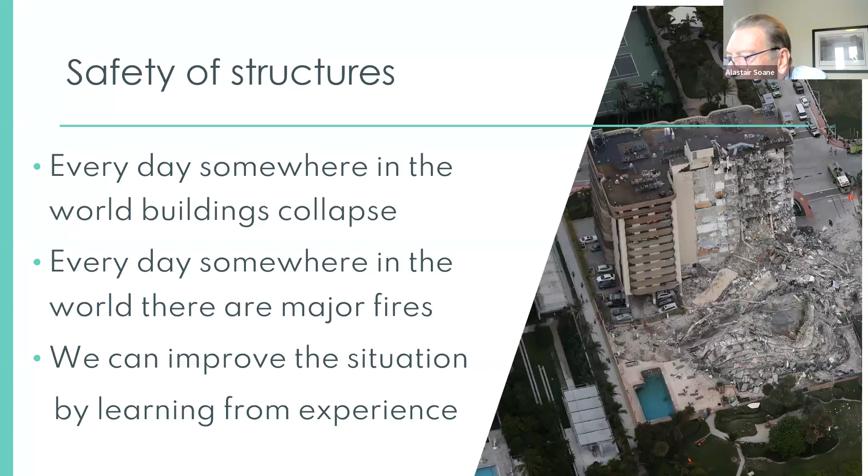Now, it's a sobering thought, but every day somewhere in the world buildings collapse, and somewhere in the world there are major fires. But we can improve the situation by learning from experience, and we'll talk a bit about how we can do that. So the benefits are clearly set out, what we can do with the system we have.

We make structures safer and ultimately save lives. But in the background to that, we can promote cultural change, we can identify shortfalls, we can improve competence, which is very important because we often find that competence is lacking.

And we can assist with horizon scanning, which is looking beyond what is happening normally and seeing what might be the next big problem, might be the next big fire, might be a big structural collapse. But very importantly, being a part of the CROSS community protects your well-being, because anybody who's been associated with a major failure or disaster knows how terribly debilitating it can be. It can ruin lives, ruin careers, ruin firms. Very important to not be involved in a major collapse or catastrophe, and by being a member of the CROSS team, as I say, it will help you do that.

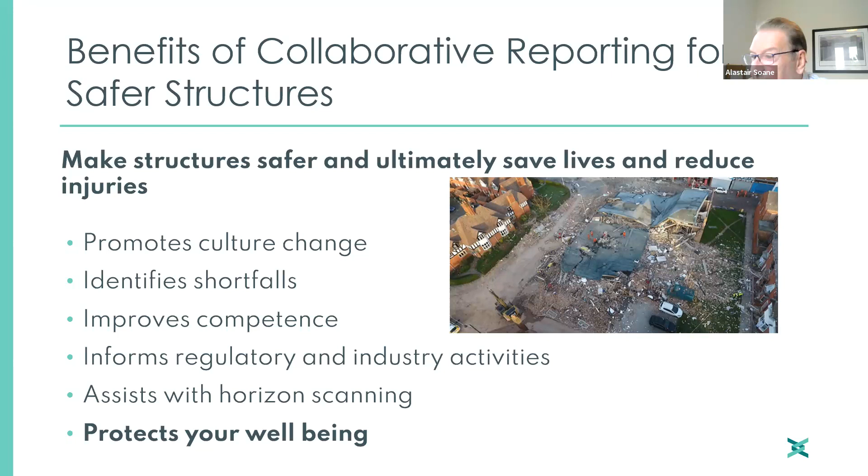So the input to our system is that we get confidential reports to our website. We look at significant events in the public domain, and we get comments from our expert panel, and more on all of those in a few minutes.

So we have a website. Anybody can link up to that. I hope all of you have, but if you haven't, do so afterwards. And everything on the website is free to use.

We promote stuff through social media. We publish reports with expert commentary, and that commentary is designed so that the people reading the report and the commentary can avoid that sort of event in the future. We publish periodic newsletters, we publish occasional alerts, and we make presentations such as this. So there's quite a lot of output. It's all on the website.

So here's some background, and these are just a few slides of major collapses in different parts of the world. This in Bangladesh was the worst man-made, man-induced building failure that we know of, which wasn't associated with some kind of terrorist or military activity. 1,200 people were killed when the garment factory came down.

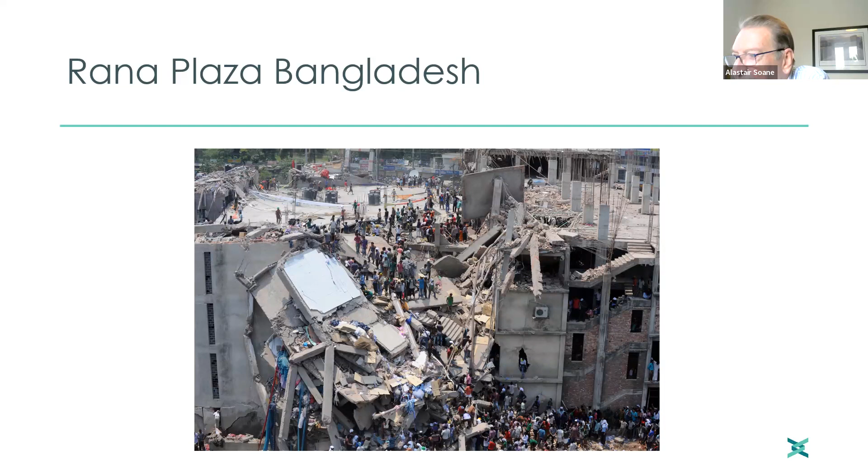In Nigeria, a lot of collapses. Fortunately this one didn't injure many people, but we hear very little about them. This is a classic pancake collapse of a nearly completed building, all folding down on itself.

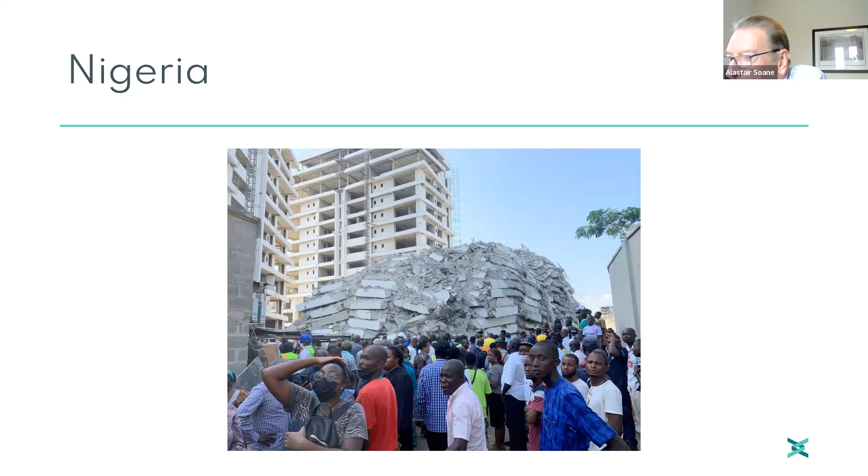India is a place where there are many collapses, and again, not terribly much comes out about the reasons for that. And in the UK, we've had two major events. One was back in the 1960s, Ronan Point, the building on the left here. We'll talk a little bit about that later. And then on the right, the Grenfell Tower, the tragic fire a few years ago, which killed 72 people in the UK. So we have had our share here of catastrophic building failures.

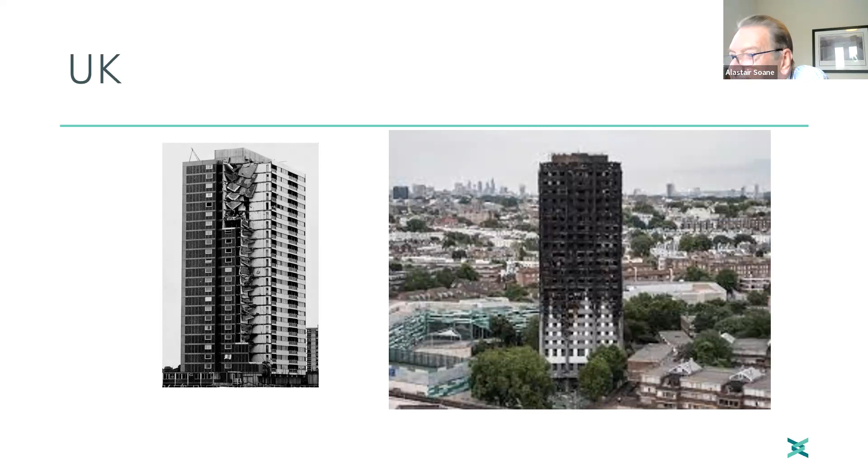And in the US, there has been the catastrophic failure of the Champlain Towers South building. Again, a bit more about that later.

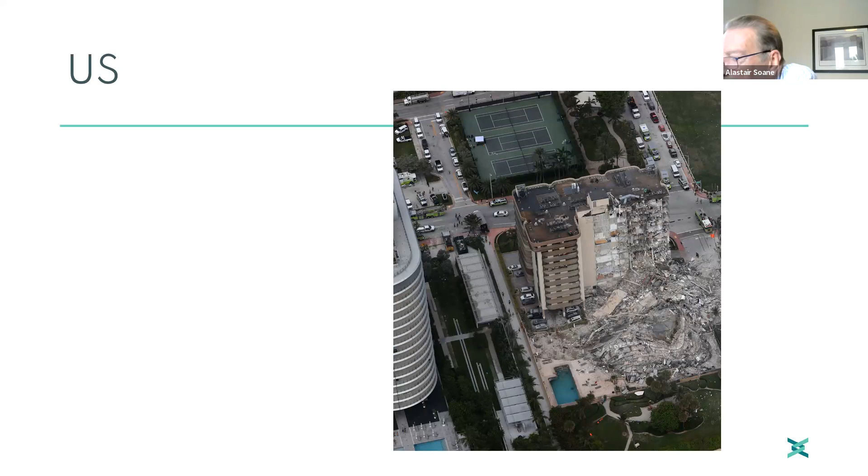And we do have an international network of CROSS. The first group who joined were Australia, and then they were joined by New Zealand, so we've got CROSS-AUS, which is Australasia. We have got CROSS in the United States, which is very active. We hope the next organization to join CROSS will be the Proof Engineers Society from Germany. And there was a time, led by Tony Smith, one of your stalwart members, when we looked at it for Southern Africa, but still some work to be done before that could be made to function fully. But there is an ambition, if the ambition exists on your side, to bring Southern Africa into the CROSS family.

So here is the reporting process that we go through, and we'll start off with a timeline. Back in 1976, there had been a couple of failures. There had been some bridges, box girder bridges, which failed, and that was due to engineers not appreciating the fact that they were scaling up the construction of small bridges to much bigger ones. Owners wanted bigger spans, wanted cheaper bridges, and the flatness of the plates making up the webs of some bridges were not as flat as it was expected.

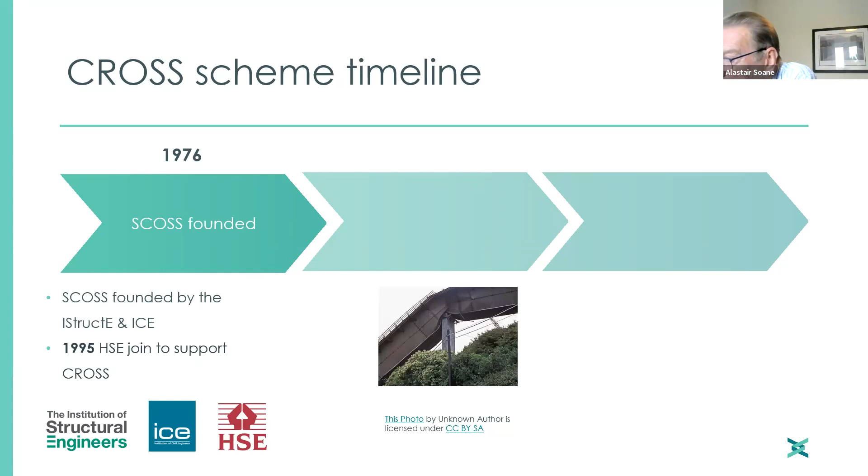So there was buckling. There were 2 or 3 major collapses. Then there was also Ronan Point, as mentioned. At Ronan Point, this was a building constructed of precast floor and wall panels, not very well connected together at all. They were kind of piled up, a bit like a house of cards.

Up near the top, a lady one day decided she wanted a cup of tea. So she filled a kettle, and the buildings had gas in those days. She lit the gas, but something went wrong. There was an explosion, a relatively minor explosion, but the whole side of the building collapsed, causing a number of fatalities. That was the first time the phrase disproportionate progressive collapse was used.

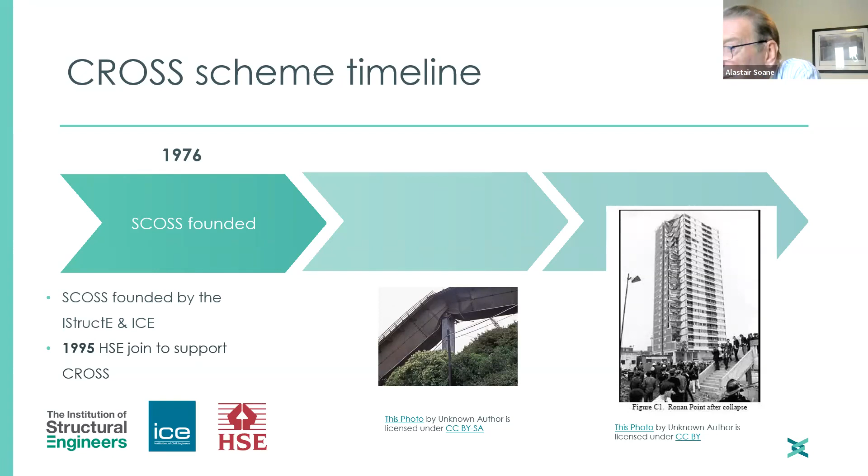So the Institution of Structural Engineers and the Institution of Civil Engineers formed SCOSS, the Standing Committee on Structural Safety. In 1995, HSE, the UK government's Health and Safety Executive, joined in to support the work. In 2005, they decided that a lot of stuff was happening which wasn't necessarily reaching the press or the headlines, so a voluntary confidential reporting scheme should be launched. That was when I came in. I joined to start a trial process, and I'm still here.

We used as a model a system called the Aviation Safety Reporting System, designed by NASA. That's been very successful in the aviation world, and pilots, ground crew, staff, anybody associated with the aircraft industry can report stuff. That's helped improve aircraft safety, which has aided any of us who have flown any time over the last 40 years.

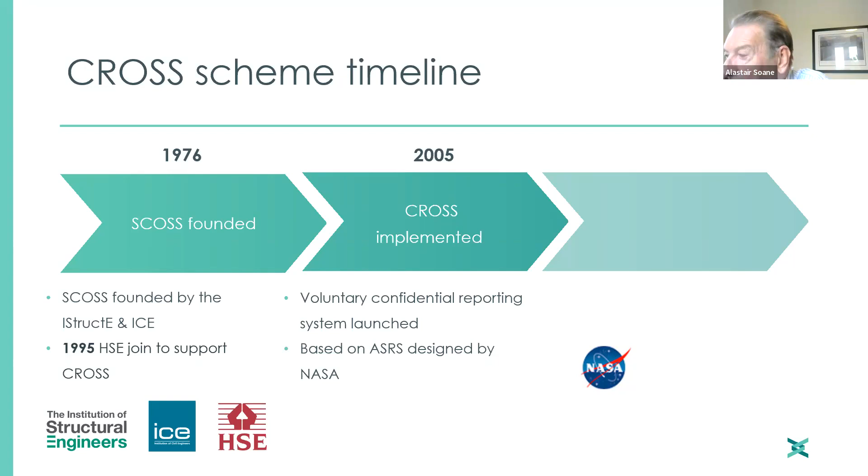In 2021, we expanded into fire safety following the Grenfell Tower fire. There have been 2 major investigations into that. One was by Dame Judith Hackitt, and she produced an interim report into what might be done to prevent similar things happening in the future. The other is an official government inquiry, still going on, which will publish its results sometime next year, covering what happened and why it happened.

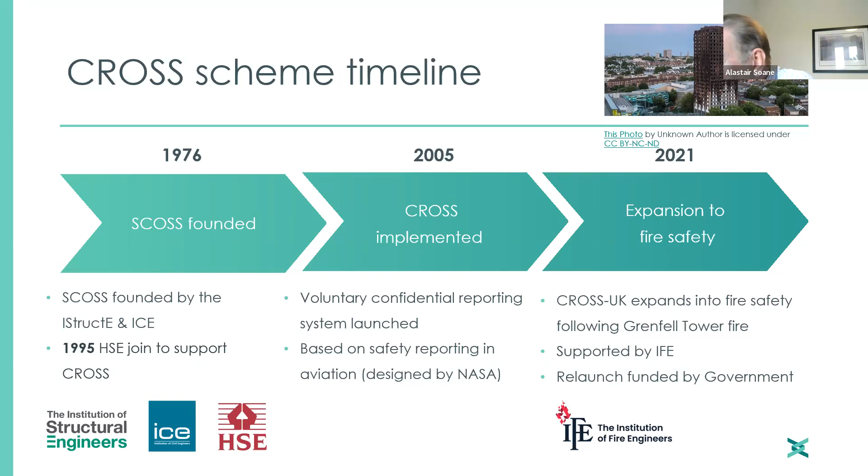But Judith Hackitt's report contained a recommendation that CROSS should be expanded into fire safety as well as structural safety. So we have support from the Institution of Fire Engineers, and we got some money from the government, and launched in 2021 with fire safety in addition to structural safety.

So what can be reported? We're a kind of cradle to grave organization. We will take stuff at the design stage, the construction stage, the operation stage, and at end of life. Most of the structural reports we get come in at design or construction, in fact nearly 50% at construction. We don't get that many during the occupation phase, because not many structural engineers are involved at that time. And we do get some about demolition going wrong.

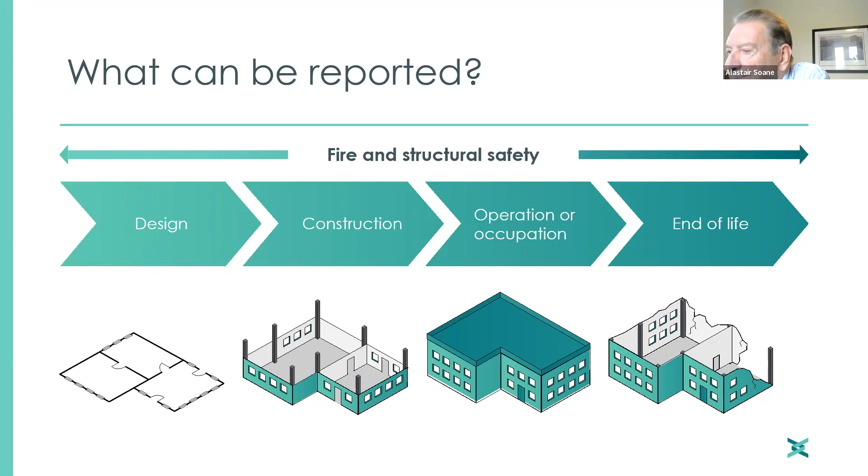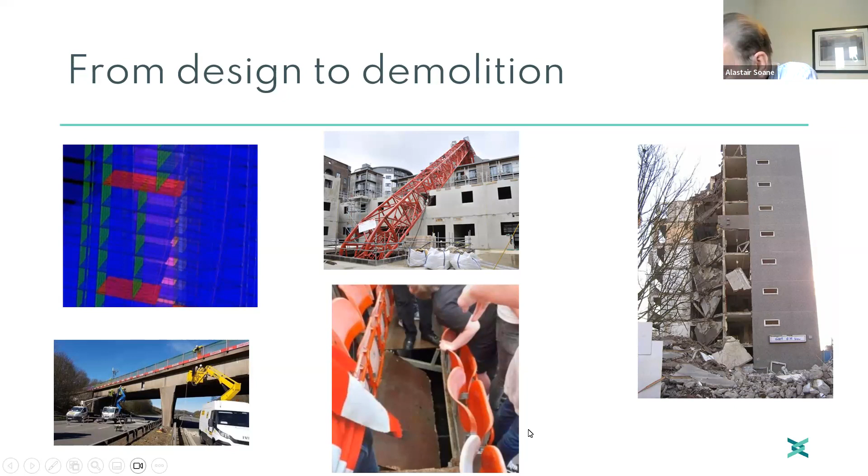And then on the right is a collapse during a demolition. This was a large panel structure similar to Ronan Point. The demolition contractor was going to very, very gently knock it corner down, and then they touched the corner with a machine, and the whole lot came down in another progressive collapse. So we do get examples from start to the finish of the process.

So we have got an SRMS system, which is a complicated set of rules which abides behind the public face of our website. And here's how it works.

Somebody will submit a report. And the process for doing that is very easy, and I want to encourage all of you to submit reports. That report goes to one of a very few number of people who are designated people, and they are authorized to see the reporter's name, but they then anonymize the report.

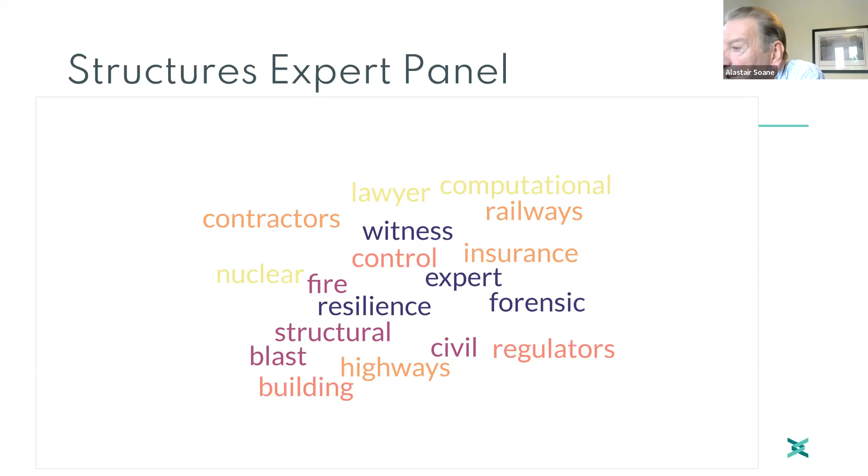So here are some examples, and one of these is in the public domain. There was a bridge that collapsed in Florida in 2018.

It was a precast two-deck assembly, which was going to be put onto supports at either end. During the course of 3 weeks, after it had been put in support, large cracks developed in it. So we published an alert in association with CROSS-US.

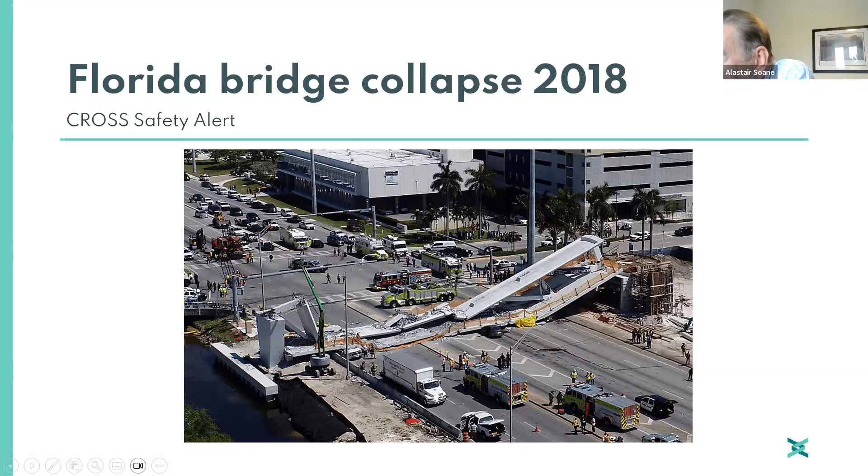Nobody had the ability, the desire, whatever, to say we must stop what we're doing here, prop this thing and find out what's happening. So they said, right, well, we'll apply a bit more force and see what happens. And down it came.

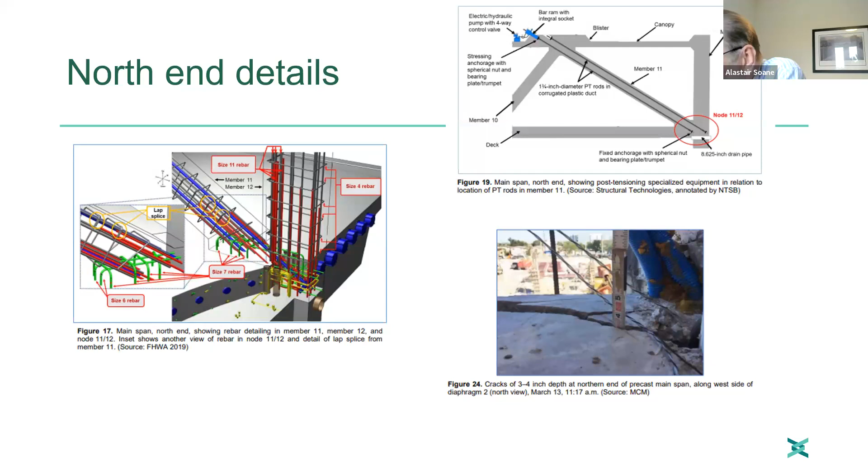The lesson learned there is if you see something which is defective, let people know. If somebody had said we'll look at those cracks, that might have been a precursor—an event—but as it turned out, it was a catastrophic collapse with fatalities.

The gable end of this school building was sucked out, and 9 tons of masonry landed on a footpath. That is another question of luck and timing, because a few hours later there would have been young children and parents walking along there on their way into school. That turned out to be a generic fault, found in quite a number of other school buildings.

It's surprising because there weren't the same designers for all these buildings, there weren't the same contractors, but they had not installed wall ties properly, they had not installed wind posts properly. So the result was there was nothing to stop these gable walls blowing out. Although only one blew out, 17 others were found to be defective and in need of repair.

So the precursor was a safety one. Nobody was killed, but nevertheless they could have been.

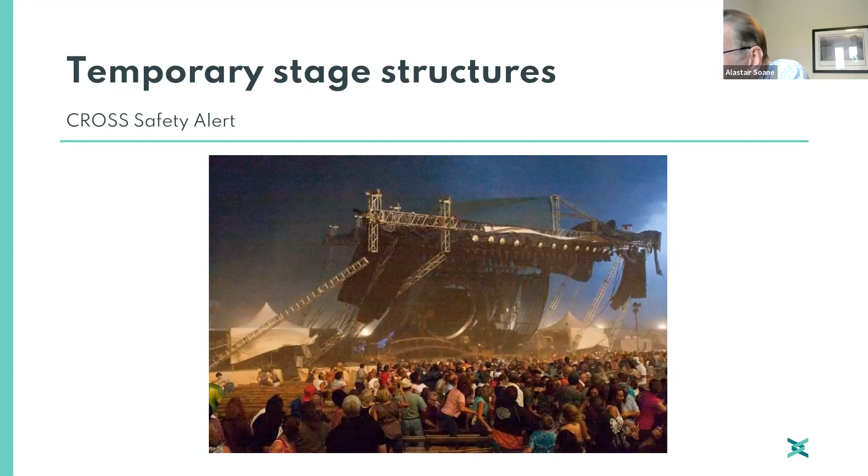Up at the top there was a very big downstand truss, and the intermediate floors were suspended from that by suspension hangers. Then one day, just after 40 people had left the site—another near miss, a matter of luck and timing—the whole structure collapsed.

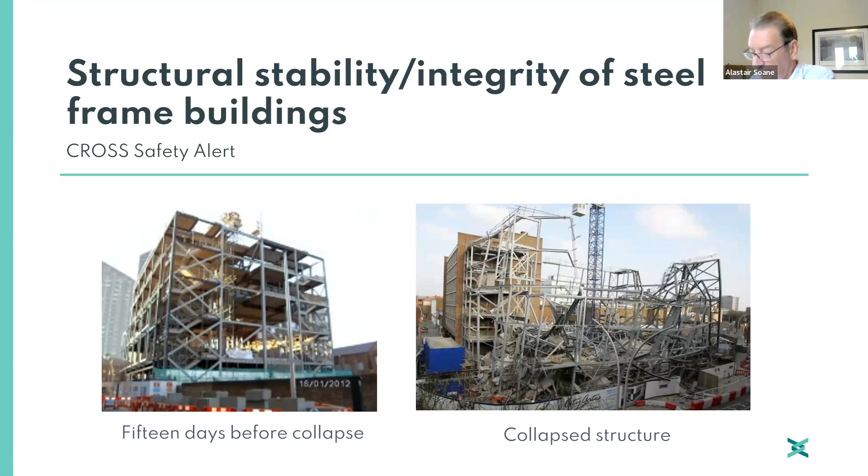The reasoning was never fully fathomed out, but it was to do with tension members failing, and there were inadequacies in terms of design and construction. So the lessons learned from that are about paying attention to the way structures, particularly those without robustness, can fail—and if you've got tension structures, you tend not to have too much robustness.

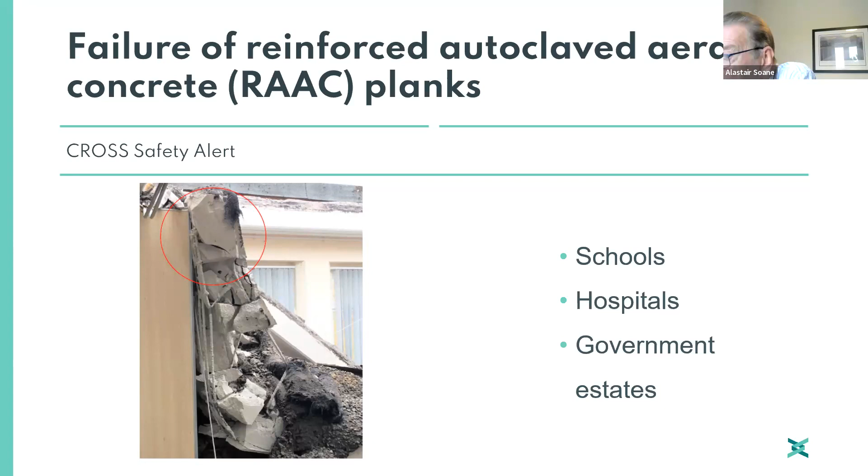So we produced a safety alert in 2019. Here's another one, a plank which had collapsed without warning, and here's the consequence. But this is a hospital which is propped. So quite often you go to a UK hospital now and you'll find some beams and some props holding up the area in which you are being looked after for whatever complaint you've got.

This is a quotation from the London Times in August, where a government minister said 34 buildings have concrete roofs in such a poor state they could collapse any minute. The point is, there have been 150 schools identified now in the UK, partly closed because of the problem. It's probably the best example we've had for the use of CROSS. We get a report in, we process it, we publicize it, we get a few more reports in, we publish an alert. The alert is taken into account by government departments, but not quickly enough. So what we forecast in 2019 has come to pass big time in 2023.

So I'm going to give you a couple of very simple examples to show you that not all CROSS stuff is at the high end and involves fatalities.

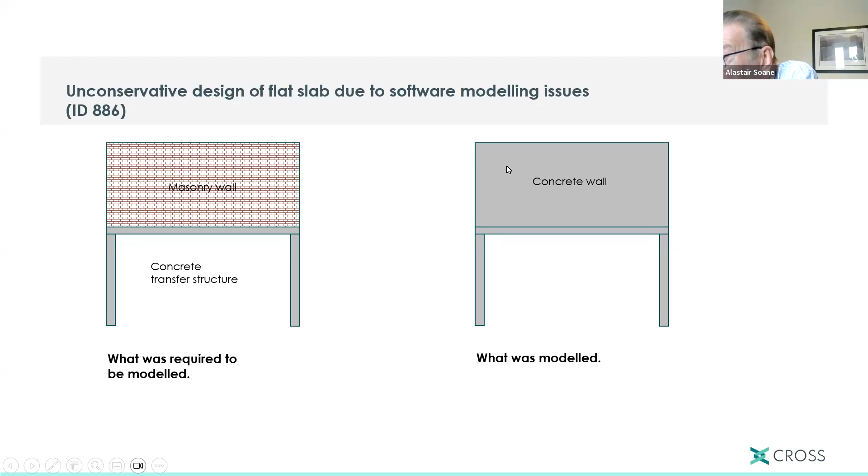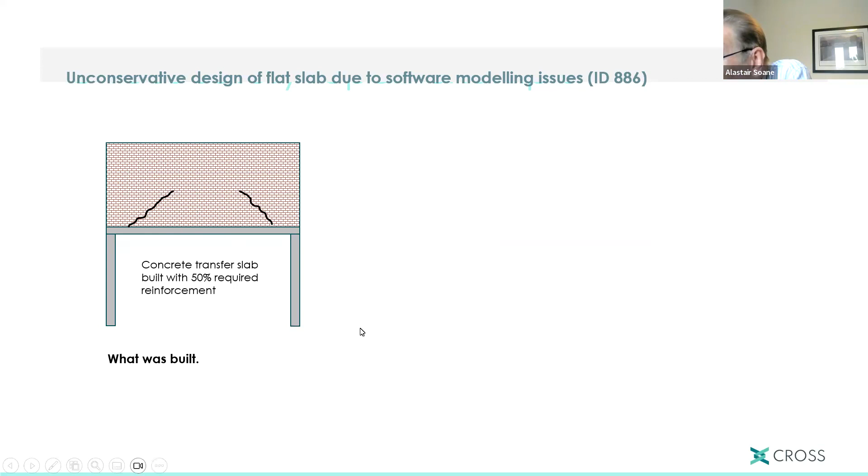Here was a model. What was required to be modeled was a concrete transfer structure with a masonry wall above it. So that should have been modeled as a masonry wall, but instead it was modeled as a solid wall, meaning the properties of masonry weren't given to it. So it was entirely different in its form of behaviour. What happened on site was that the transfer slab only had 50% of the required reinforcing, because of course the brickwork applies a load, particularly as that load is applied as the brickwork is laid, right along the beam, whereas if that had been a concrete wall, it wouldn't have applied the load in the same way.

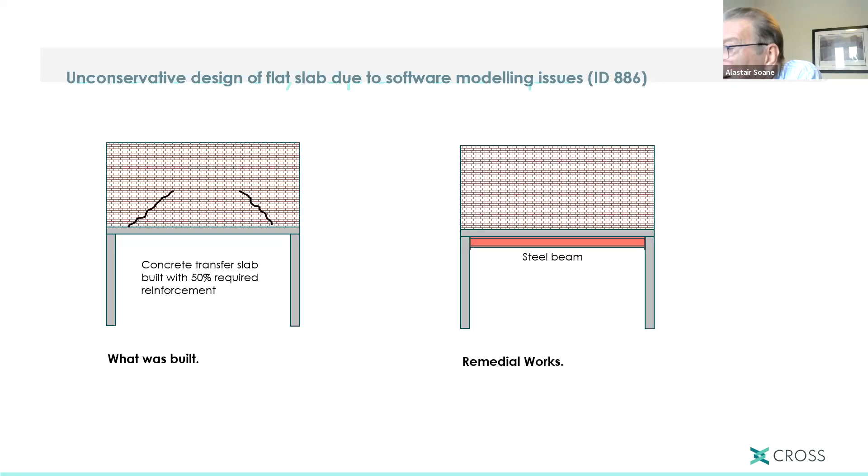The solution had to be putting a steel beam in there. And then you can imagine the consequences for those involved in the design and the construction of that. That was a very simple case.

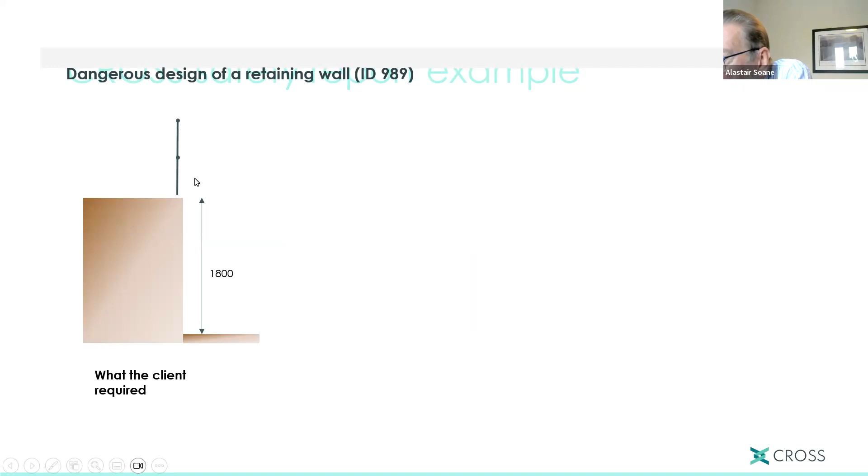We've got another one which might have been much worse, but wasn't, and it's rather representative. What the client required was: they had a lump of soil extending backwards, goodness knows how far, with a road surface on top, and a handrail that was 1.8 meters high, and they wanted a retaining wall. The designer said, well, we'll use brickwork, and the computer model was entirely inappropriate. It was designed as fully fixed on three sides, despite the fact that at these 4.5 meter lengths there was a movement joint, so there was no fixity at all.

It was a cantilever, so it was only fixed at the bottom. The ground underneath was poor quality. The designer had assumed there was a high bearing pressure allowance, and there would be horizontal loads on this railing above, and none of that was taken into account. Fortunately, this was spotted by a checker before it was built, but the checker had a real argument with the designer to show that this was an entirely inappropriate design.

And if it had been built, it would undoubtedly have failed completely. There have been quite a lot of cases of retaining walls failing and killing people when they did so.

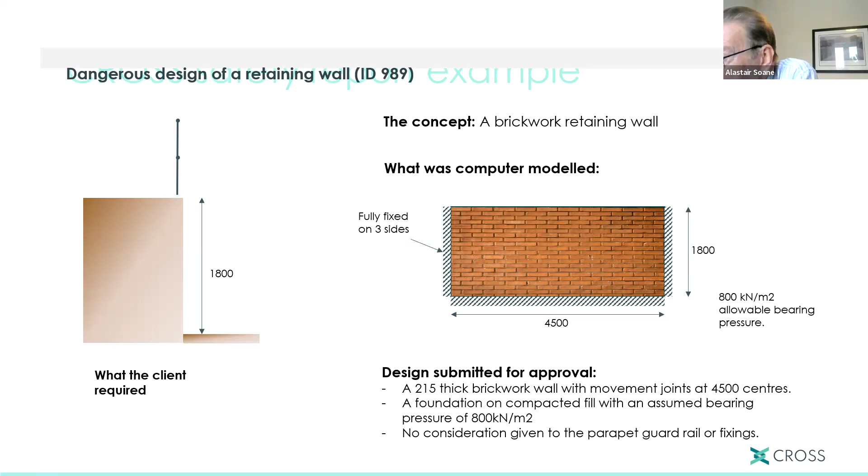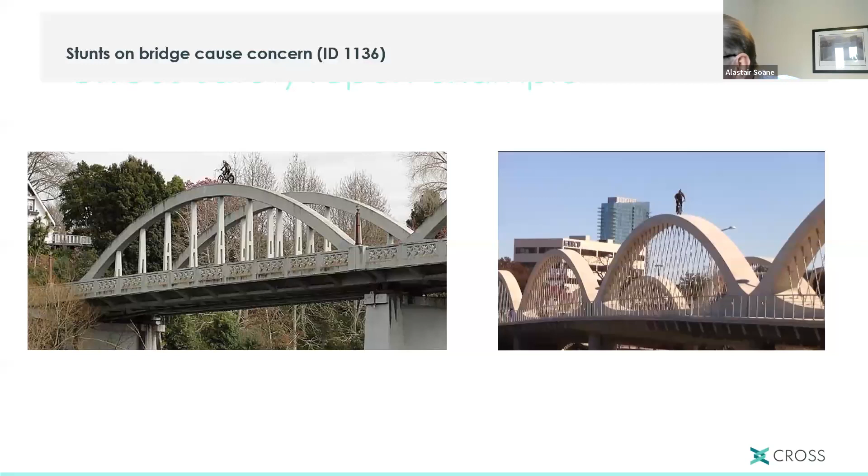Here's a slightly more light-hearted one. We've had reports of people stunt riding across the arches of bridges, and we've issued a warning to bridge designers to make sure that, if you don't want this to happen, however exciting it might be for the riders, you should put some form of guard at the bottom of the arches to prevent people accessing them. But then, on the aesthetic side, you've got a beautiful arch which comes down and melds beautifully with the road surface, and you don't want to put in spikes there just to prevent the odd cyclist.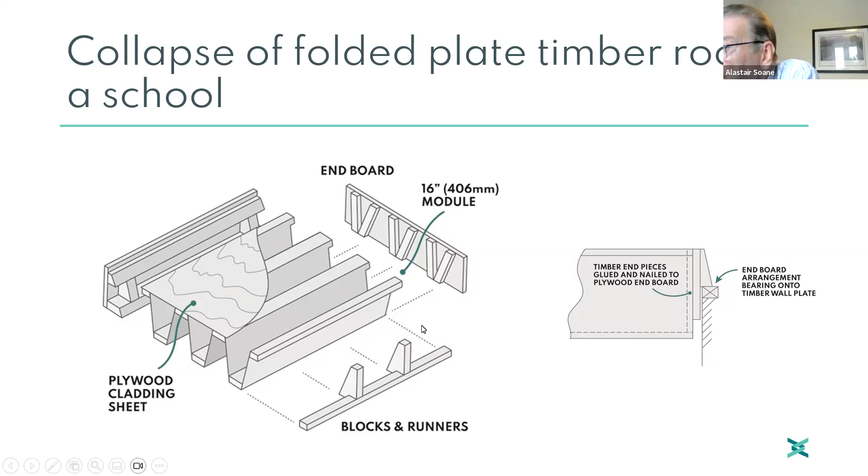Here are some key points from it. It's potentially safety critical because it involves schools. The material, you might think, is more appropriate to a do-it-yourself household project. There were two sudden collapses, either of which could have been catastrophic had the buildings been occupied at the time. So again, precursors - and now we've issued an alert to government, whom we hope will circulate to all owners of schools, asking whether they have an old folded plate timber roof like this.

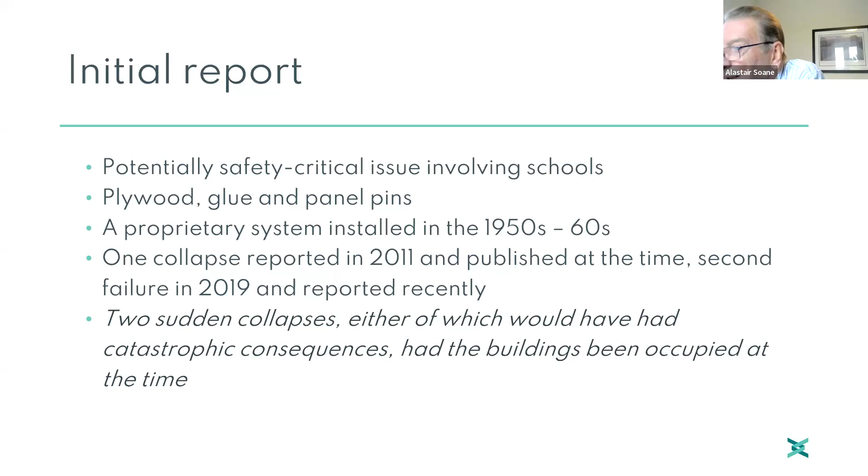So moving now on to fire reporting. The Great Fire of London in 1666 is famous - started apparently in a bakery, burned down most of London - and that was the start of fire safety within the UK. But mostly it developed over the centuries as a means of fighting fires rather than a means of protecting against fires.

Here's an example of a car park fire in Liverpool, UK, in 2017. There was a 7-story car park. Fire started in one vehicle on the 3rd floor and spread rapidly, vertically and horizontally. It's an open-sided car park, but made of concrete, so it withstood the fire for several hours. Adjacent to the fire was a major arena, a hotel, and an apartment block, so firefighters couldn't save the car park, but they protected the adjacent buildings from the effects of the fire.

Inside, you could see that the thin concrete floors had collapsed, but the main reinforced concrete structure was robust enough to withstand the fire, and it later had to be demolished. But it showed the robustness of a concrete frame in such a situation - still, about 1,200 cars were destroyed.

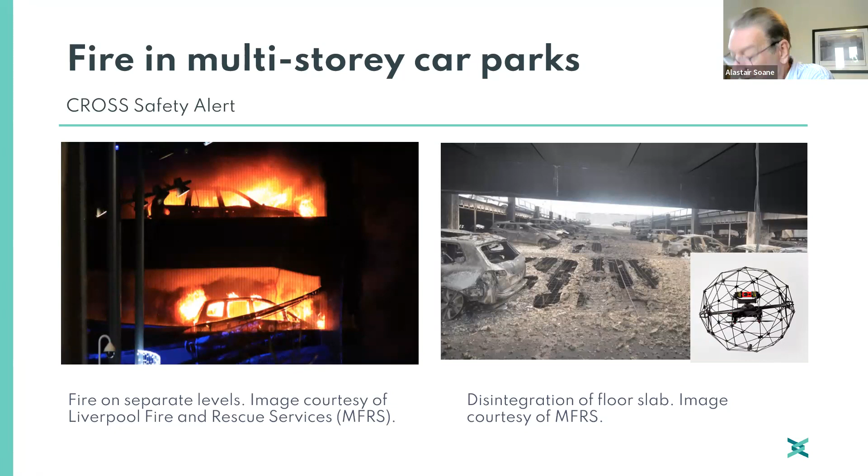This little image here is a drone which was used to go inside the very dangerous car park and make video film - it actually landed on the bonnet of the car which was the original source of the fire, and took lots of video of it. We issued a safety alert on that, saying it's very rare to have multiple fires in a car park, but they can happen, and owners, occupiers and designers should be aware.

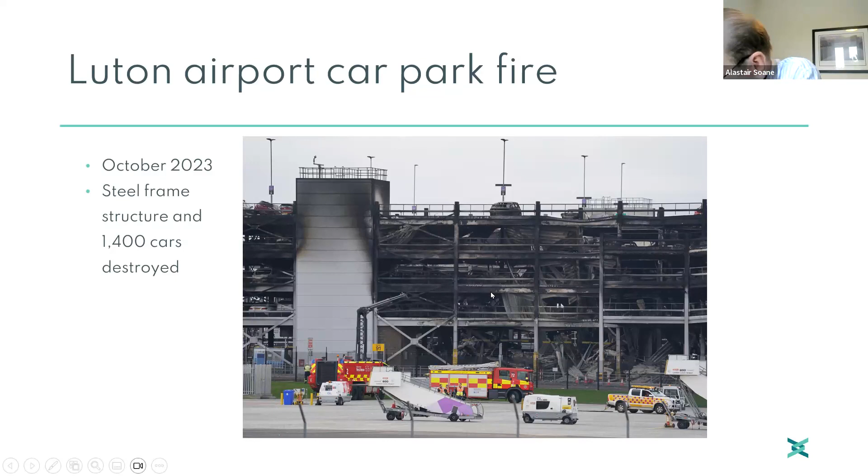Then two weeks ago, this steel frame structure at Luton Airport in the UK went on fire - 1,400 vehicles lost this time. You can see the steelwork has softened, the steelwork has collapsed, and the whole of that is going to have to be demolished as well. Interestingly, in the UK the regulations for open car parks require only 15 minutes of fire resistance, enough time for somebody in a car to get to a place of safety in a staircase tower. Nevertheless, it doesn't protect the asset. This building was designed and constructed after our alert on multiple story fires.

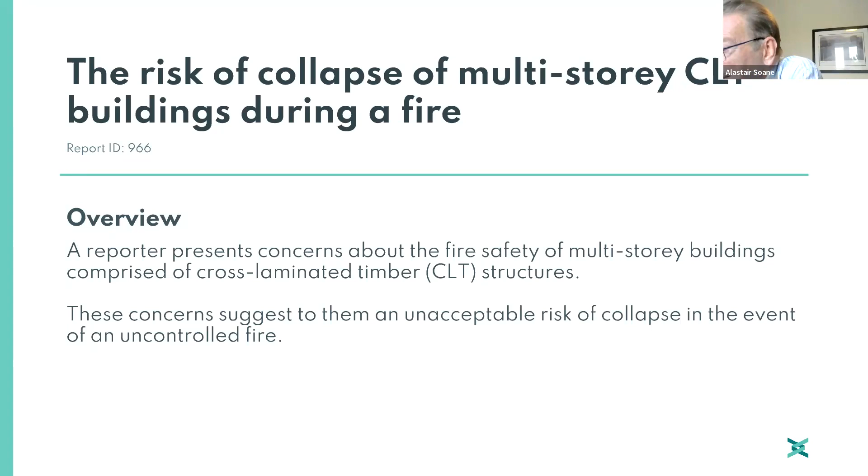Here's another one: a risk of collapse of CLT, cross-laminated timber structures. This is coming at the very bottom of our risk pyramid. We haven't had much about fires in such buildings, but we have issued an alert about it - we've published a report to industry saying be careful about the fire risk of CLT in multi-story buildings.

Something which has hit the headlines all around the world, of course, is the safety risk of lithium-ion batteries. This is a test rig - when you severely damage a car propulsion battery, there's a jet of flame, much like a giant oxyacetylene flame, which can be 2 meters long or more. If that happens in a car park, it can very quickly ignite adjacent vehicles. Never mind the fire risk from the batteries themselves - all modern vehicles have a high proportion of plastics, rubber, and electronics in them. They're much more flammable than they used to be.

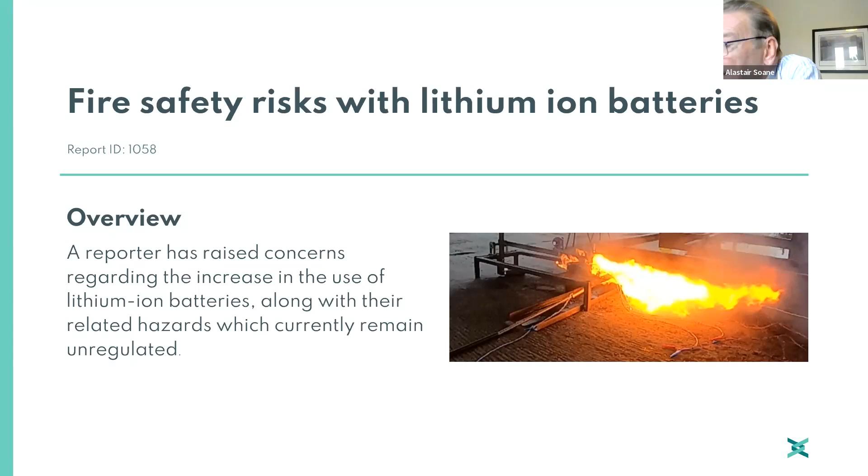So this is an ever-present and perhaps ever-increasing risk of fires in multi-story car parks. And of course, these would be worse if car parks had buildings above them, which is not the case in the two that we looked at.

So collapses keep reoccurring. We'll go back to the one we showed at the very beginning, the Surfside building in Florida. It was 12 stories, collapsed progressively and almost instantaneously, but not quite. There were some precursors in terms of cracking, which had been observed some time before this collapse. It was reinforced concrete, designed to the codes of 40 years ago, and may not have been designed as rigorously as we might do nowadays.

There's an investigation ongoing by the National Institute of Standards and Technology in the States, and the two people leading that are in fact two of the leading board members of CROSS in the US. So we don't know what their deliberations are, but we'll be in a very good position to publicize the results when they come out next year. And those recommendations are going to have a profound effect on thinking about aging of concrete buildings everywhere in the world, because how do we know there aren't more similar buildings with collapse potential?

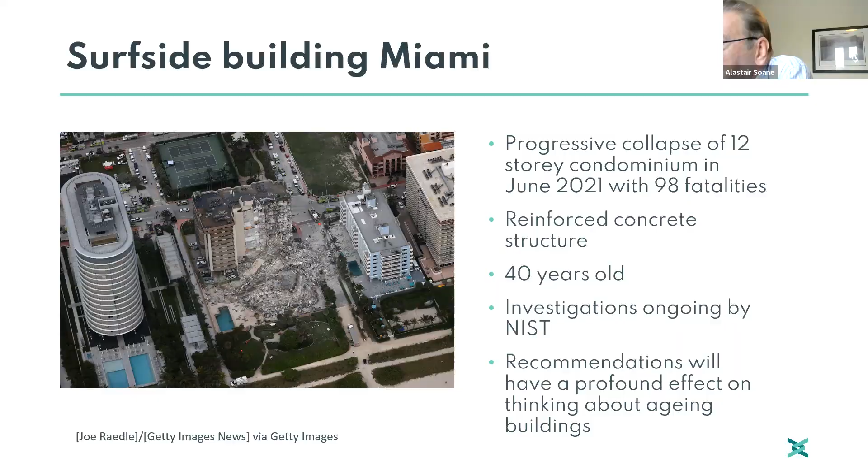So we're nearly finished now. Here are the key lessons which we can take from the reports which we've had and the public events which we've talked about. The first one is that similar issues recur. So we see quite a lot of the same kind of thing. We've got to keep giving the same messages.

Communications and a lack of responsibility are very important, particularly with modern methods of contracting, with lots of different parties doing lots of different things, and everybody trying to shuffle responsibility off onto somebody else. Competency is lacking at every level, from the tops of boards of construction companies down to the people operating at all levels on site and in the design offices.

We've got to worry about deterioration and degradation in older structures, for example Surfside. And changes in architectural trends—we'll go back to the Grenfell fire, which was fueled by the flammable nature of the construction material put on the outside. Although it wasn't a load-bearing material, it was simply there to protect insulation, which had been put up to insulate the buildings and make it look pretty.

Poor understanding of computer stuff, which we've talked about, and we're going to be producing in the not too distant future an alert on that. We haven't seen many computer-aided disasters yet, although there was a huge one in the North Sea a few years ago when a vast concrete platform off Norway completely collapsed because the computer analysis was wrong. We haven't seen that associated with major buildings yet, but we will.

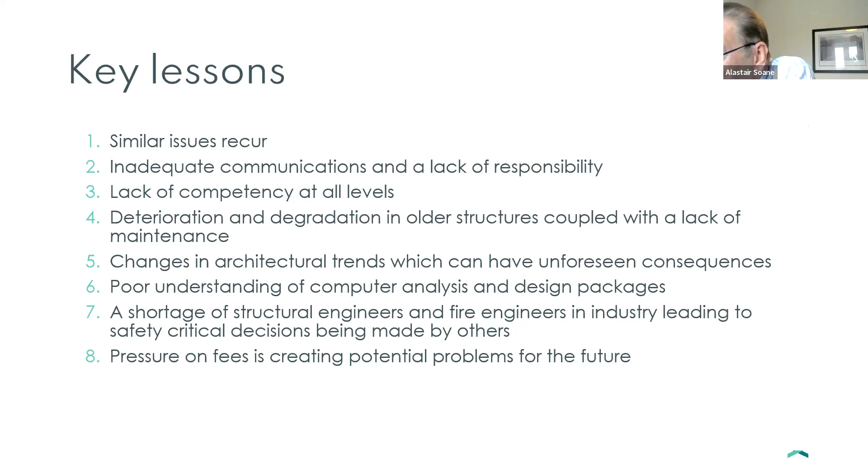For those of you in the design environment, pressure on fees. For those of you in the construction environment, pressure on costs. Poor supervision on site amounts to a lot of the reports we get. And then we've got the technical problems in addition to the human traits of carelessness, corruption, and ignorance. We have the 3 Ps affecting what we do: products, processes, and people. And people are the highest up on the list when it comes to the causation of what has gone wrong.